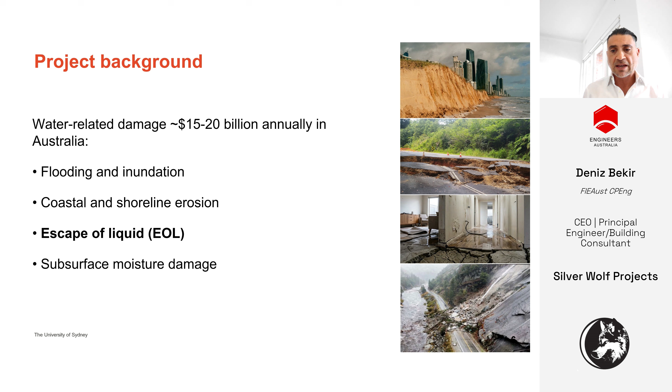And that could be consisting of flooding, inundation, coastal shoreline type erosion, escape of liquid, and that being escape from a fixed pipe or an open pipe such as a water pipe, a flexi pipe, stormwater pipe, sewer, and subsurface moisture damage. So within the insurance industry, there's different perils, but the escape of liquid and flood damage is one of the major losses that we in Australia face.

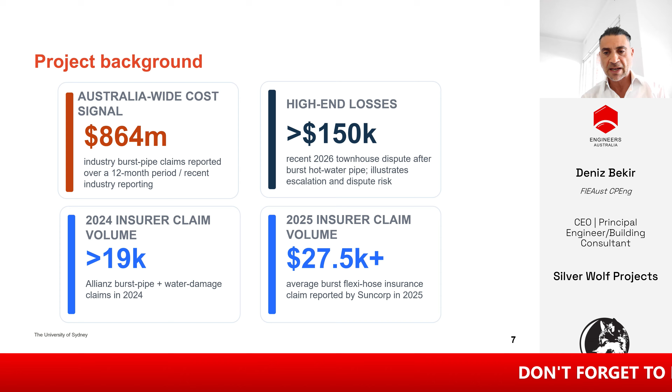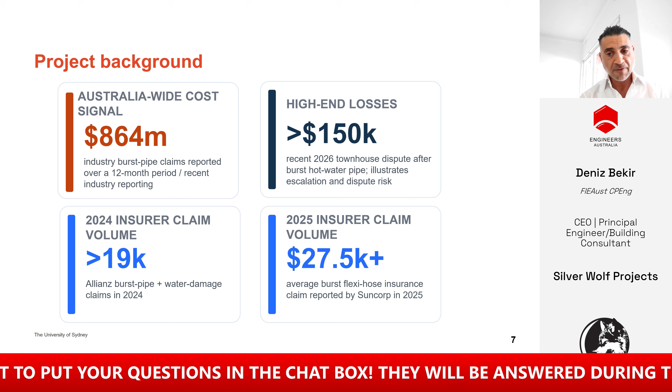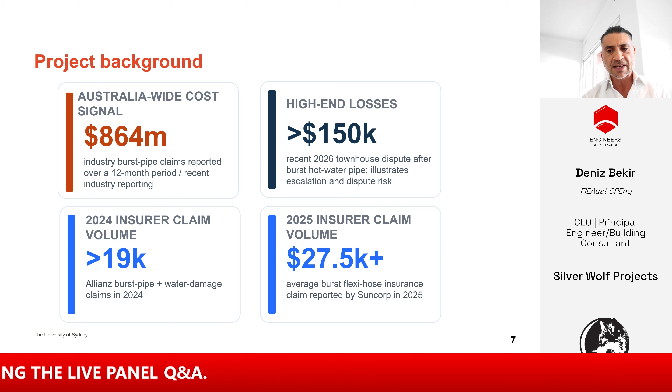And in saying that, the assessment process is very important, because in some cases, when it's not clear if resultant damage - that's damage that has resulted from that claimed escape of liquid or flood - has caused damage to that building, that is where dispute and issues arise. So this study is being put together in order to mitigate that, to give clarity and transparency relating to engineering assessment, as well as the building works for all stakeholders within the insurance process.

So why do we need this study and the development of this guide? And why is it time to take out the guesswork out of flood and escape of liquid damage assessment and reporting? It's an interesting question, because at present, the way engineers and building consultants assess claims is through general observation and other forms of documentation. At this present moment, there is no scientific grounds for understanding what the resultant damage would be or has occurred from an escape of liquid or flood.

And as the answer says, it would benefit all stakeholders. So this particular study doesn't just side with one - the insurer or the insured. It ascertains a fair and reasonable outcome for all parties. Because what this does, without putting a pun, is draw a line in the sand and say what damage could or could not have resulted following an escape of liquid.

So the reasons for this: it brings science and engineering into the realms of engineering assessment of escape of liquid claims or building movement claims, giving proximate cause rather than just an opinion or an assumed arrangement. This study will produce a zone of influence, and that zone of influence will bring an area of damage that would have resulted from an event, and it will reduce costs in the sense of wasted, lost, or incorrect type assessments or building work.

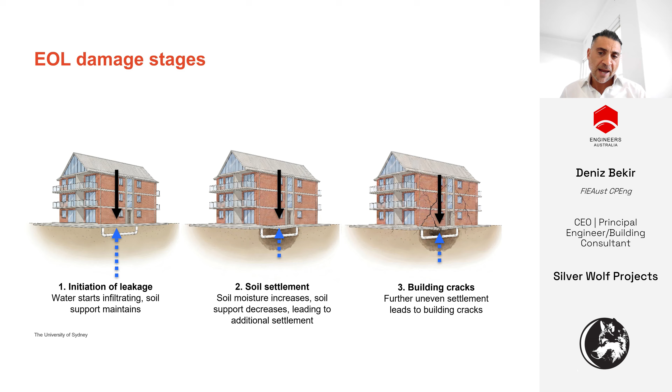It's very common in an insurance claim to have a leaking pipe or an escape of liquid from a bathroom waterproofing membrane, or an overflow or a broken flexi hose in a kitchen, that would inundate an area, go into the subfloor or subterranean area, cause saturation over some period of time, and then a claim for resultant building movement or cracking or damage would be lodged.

And as engineers and building consultants, independent professionals engaged by the insurers to provide that advice on causation, at this present moment we would take this approach, which unfortunately is not empirical in the sense it's firmed up with science, but more based on reference.

So let's have a look at this so you can get a feeling of what we're discussing and what we're intending to do with the study, to formulate a better method to finalise a conclusion on resultant damage. So an example would be a very simple one - we'd have a single-storey dwelling, brick veneer, metal roof.

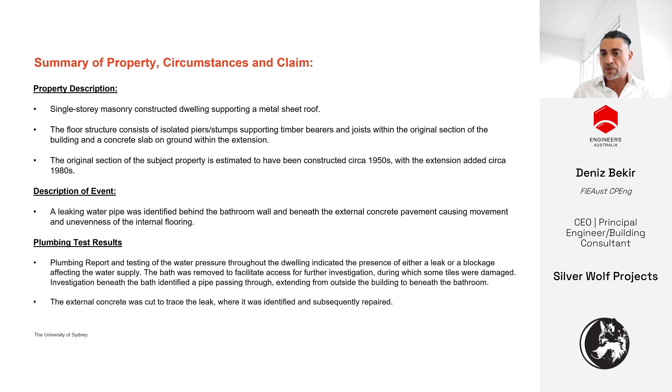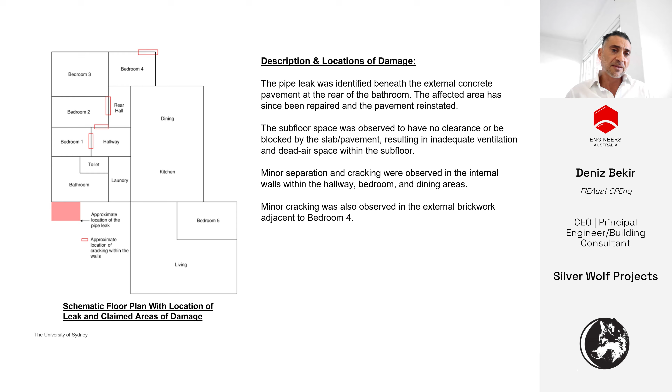So in essence, we've got a floor plan here where you've got an approximate location of where the leak was, which is outside of the bathroom. And then we have areas of claimed damage relating to bedrooms 1, 2, and 4, identified by those red squares.

And then sort of consistent damage that's been claimed as a result of building movement. So this would be within the area of the posts and piers, so differential movement would be consistent with the claim of reactivity from the ground.

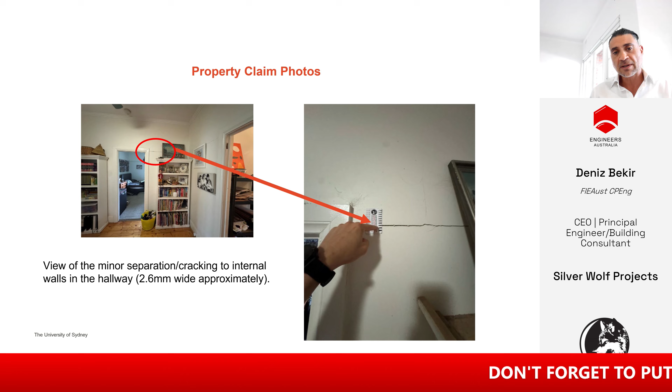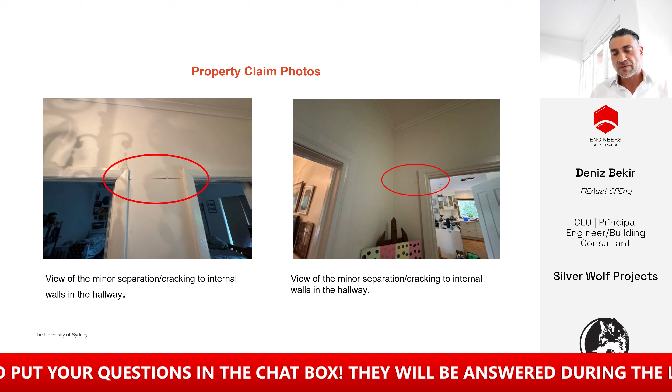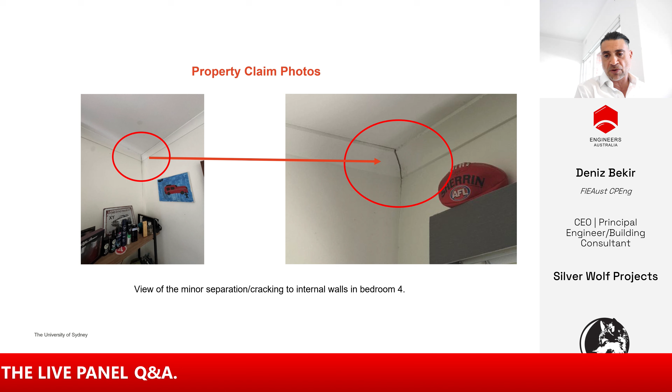And other types of cracking and movement within the plasterboard have again been claimed as a result of the escape of liquid and resulting building movement from ground reactivity due to the pipe leak. This would be a very common assessment for most engineers or building consultants looking at causation within the insurance industry or other building diagnostic professionals relating to claimed ground movement, in this case from reactivity.

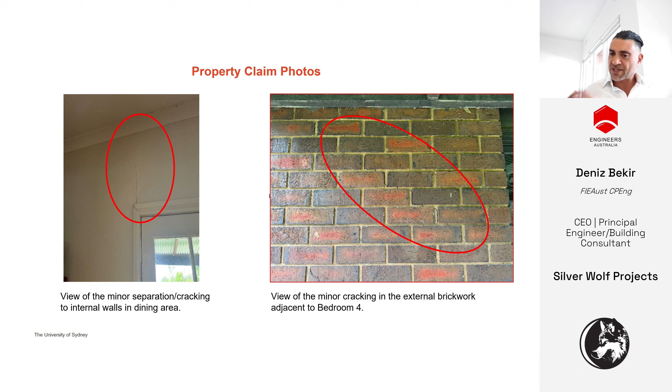At this moment, we would generally use standardized methods of adopting diagnostics. That would be, in essence, looking at the building code, the Australian Standard 2870, and the CSIRO publication on foundation maintenance and footing performance.

At this stage, most engineers and building consultants would look at that, identify the ground conditions, look at the type of damage, and make an opinion on the basis of their experience relative to the length of crack, size of crack, maybe the freshness of it, the thickness, and the geometry of how it has cracked, to assess whether that was as a result of any ground movement. The problem with this is that it's all based on visual evidence.

It's all based on assumption and correlates with the expert's or engineer's or building consultant's experience. It doesn't have any scientific basis in the sense of categorically nailing down that this was a clear result from the leaking pipe. Yes, it could be building movement as a result of ground movement, or it could also be building movement due to articulation or poor workmanship.

So we start to remove ourselves on a balance of probabilities on what the causation would be, but again, we're not identifying exactly that it's a result from science or geotechnical study that this was due to ground movement from a leaking pipe.

Other methods, obviously, is the use of the plumbing test to identify whether there was a leaking pipe, which is standard - we actually have to identify whether there was or wasn't. But this again doesn't determine whether the resultant claimed damage is a result of that leaking pipe.

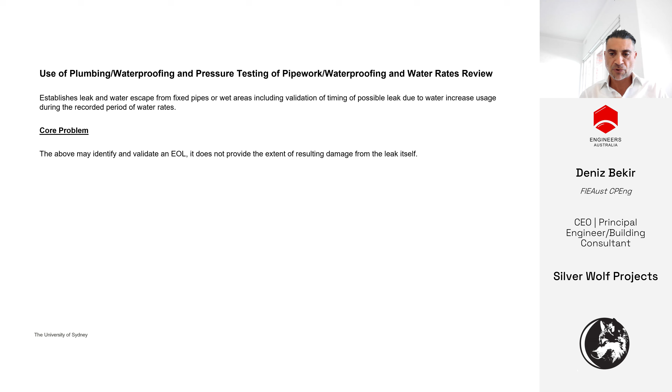One of the big tools in diagnostics, particularly with building and earth moving and ground movement, introduced specifically within the insurance industry, is floor level surveys. Floor level surveys are a method of measuring the floor level over the entire floor plate to establish whether there's any movement, the geometry, and any distortion.

The issue with that is that it's relative to the time that you take the measurements. It doesn't have a datum of what was previously there, nor what was there afterwards - it's set at the time taken. So it's not really a clear method of diagnosing whether the damage had occurred. It just shows you a real-time snapshot of what the floor geometry is.

So what's missing is a datum point - the datum point of what was previously there, or in this case, a zone of influence to establish, well, if the leaking pipe occurred in the bathroom and we established through this guide or through the science of ground movement, through time and reactivity of soil, that if a pipe leaked for 7 days and the ground was highly reactive, then subsequent to that permeability and reactivity, an expected zone of influence from the bathroom would be 3 meters.

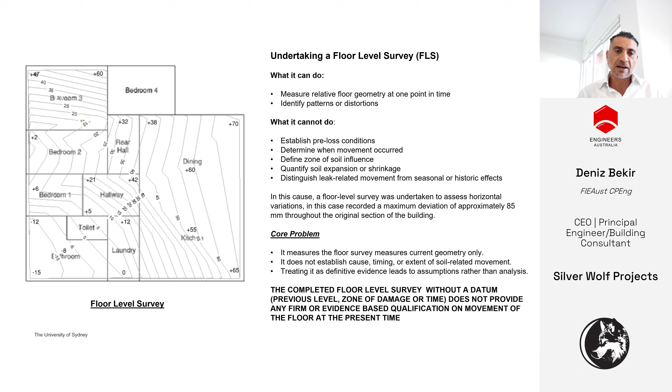So if we were to establish that, then we could have a datum, because you would do the measurements within the 3 meter radius and outside of the 3 meter radius, and then you'd establish if there was a point of difference in height, then there's differential movement, therefore it was a result. So it gives you another piece of substantiated evidence that can enable you to determine whether this movement, as claimed, was a result of the leaking pipe.

So in conclusion, we would generally identify that damage may have resulted from soil reactivity, building movement, thermal expansion, contraction, poor workmanship, and defect. But in saying that, we haven't got, at this moment, a categoric method of determining a correlation between damage, leaking pipe, and building movement. In establishing this guide, that is our aim and objective, because at this moment we don't really have a validity in the sense of another form of approach or evidence that engineers can use to correlate their visual inspection.

But by creating the guide, with a zone of influence around a point of damage, this can be a line in the sand where differential geometry can be used to prove whether or not it was part of that leaking pipe, as well as the methodology of how that would have occurred if it didn't correlate with the study itself. So it's very important that this piece of information gets produced, because it strengthens argument, approval, or rebuttal on a leaking pipe claim for both the insured and the insurer.

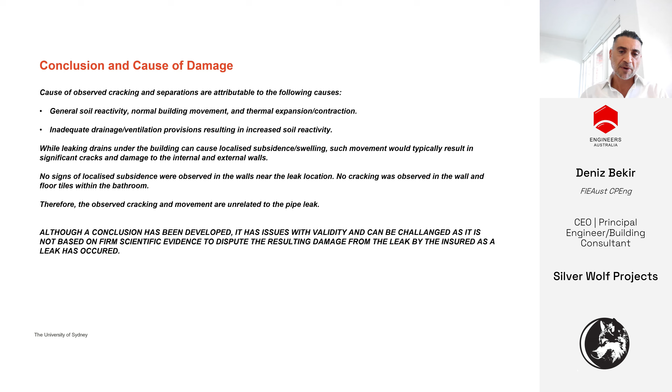In saying that, a lot of disputes occur as a result of this. The Australian Financial Complaints Authority, AFCA, is within the Insurance Code of Practice the point of arbitration where external dispute resolution within insurance claims is met between the insured and insurer, and they produce the final ruling on that, subsequent to advising and reviewing the advice.

In the approach to the proximate cause publication in April 2022, they put forward the factors they would require in order to make their determinations. This would add more credence and value by providing more evidence as to what they would determine as resultant damage or proximate cause, rather than just an opinion and visual assessment. So this is an assisting piece of information that enables better claims outcomes, clearer resolution, and transparency with the insurance process and claims handling methodologies.

So what we're trying to do here, in essence, is that at the moment we've got one equation and two unknowns. What we're intending to do is bring it to one equation with one unknown. So at the moment we've got an escape of liquid, but we don't know the duration, or we can't establish the duration. We know the soil response, but we don't know the extent of damage.

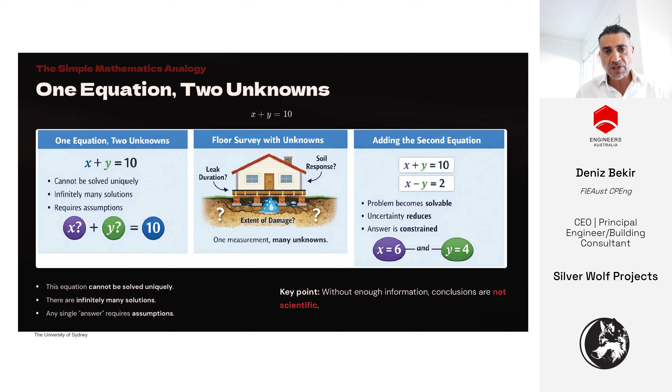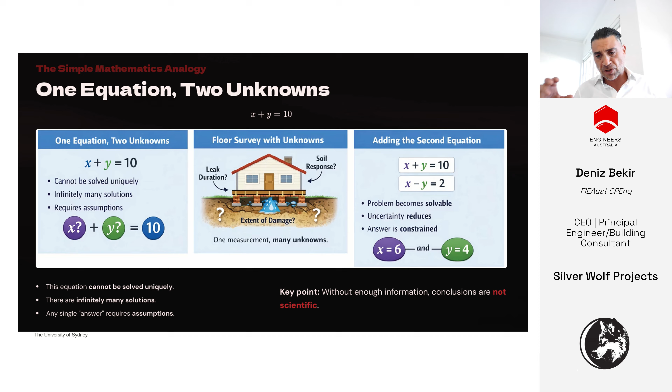So what we can do with that equation is, if we know what the soil is, and if we know what the leak is, then through this guide we can work out an extent, and that will give us a formulated response to resultant damage. This creates an ability for an engineer or building consultant to finalize with more clarity what resultant damage would be, rather than just speculative assumptions on the damage methodology, geometry, or visual assessment.

So it becomes a bit of a mathematical equation, and this mathematical equation works with other tools such as floor level survey. So if we've got an established zone of influence, we can use the floor level survey to determine whether differential movement between the zone and outside the zone has occurred. That creates an equation, or another form of evidence, to suggest or indicate, on the balance of probabilities, that escape of liquid has caused damage. So that is very important as well.

So what we're doing is bringing in the science and the engineering, removing the assumptions, to bring a solvable property equation with respect to saturated ground as a result of escape of liquid.

So the zone of influence then starts to determine the unknown. It creates the variable that we can use to determine whether damage specifically from an escape of liquid point, at a period of time, relative to a type of ground, how much would that have radiated and where would that have propagated as a direct result of the escape of liquid.

So this starts to become clearer on the resultant damage, which is where, as insurance, building, and engineering consultants, we've been asked to provide that causation report so the insurers can make their determination as to whether it was a result of the claimed event.

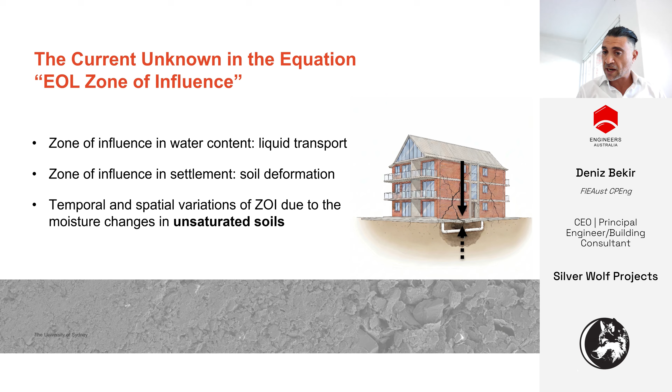So what we're trying to do here, leading up to Professor Gan and his presentation with the methodologies of how he's going to create this guide with his team, the Geotechnical Department of Sydney University, is that the aim of this study and the guide for industry is to move from opinion-based assessment to research-based assessment. The objectives of the guide and the zone of influence is that we're moving away from just assessing damage from visual inspection and diagnostics of building movement and claims of damage, now to more science and geotechnical based assessment relative to the time of leak, the extent of leak, the reactivity of the soil, and the radial movement that would be propagated subject to the study and the science and engineering behind it.

So I now am very proud to establish the understanding, the objectives of this study, which AiBEC has been involved in with the University of Sydney and Engineers Australia, and I'm pleased to now present Associate Professor Gan for him to advise on exactly the science and the engineering behind the study and what it's going to take to bring this to fruition.

I'd now like to welcome our second speaker, Associate Professor Gan, Acting Head of School of Civil Engineering at the University of Sydney. Associate Professor Gan holds a PhD from Karlsruhe Institute of Technology, Germany, and is a Fellow of Engineers Australia. His research expertise spans geomechanics, granular materials, and fluid transport in porous media, making him a leading authority on complex soil-water interactions. His work consistently blends fundamental engineering science with practical industry applications to solve complex infrastructure challenges. He is currently collaborating with Silver Wolf projects at AiBEC to develop formalised, empirically rooted approaches towards reliably assessing building movement and property damage caused by floods and escaping liquids.

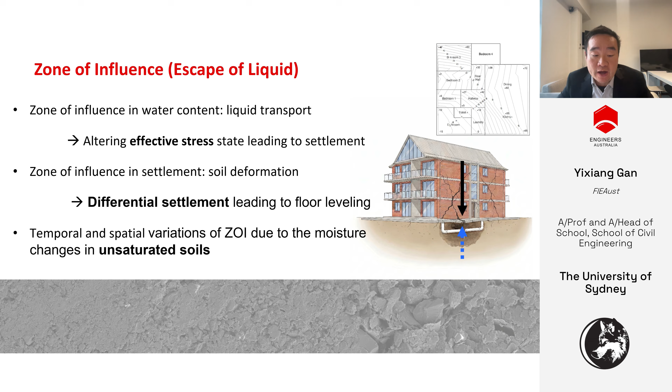Our topsoil layer, where this liquid leakage will have influence, is typically in an unsaturated situation, where the soil is basically having partially water, partially air in its void space. Now, if we look at a pile of dry sand, and try to drop it from above, we can form basically a typical stable structure of dry sand, which we call the angle of repose. So for our geotechnical engineering, this is the basic idea of how the soil's strength will look.

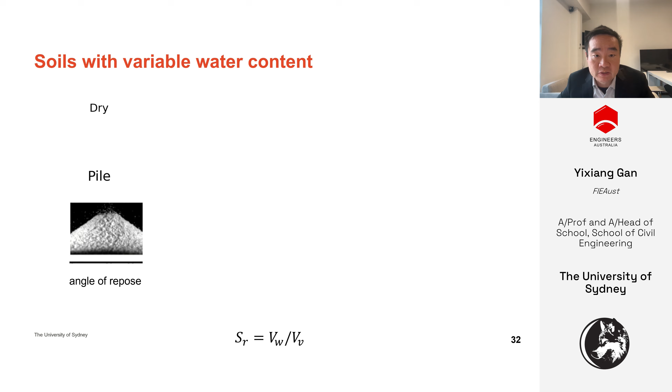For this type of sand, when we start adding a little bit of water, not too much, or keep adding water up to a certain point, we form eventually all these very interesting structures, including, at a certain range of water content, forming a tower of sand. Basically, the sand can support itself with the presence of a combination of air and water in its space.

Now, if you keep adding water and oversaturate that water tower in the middle, until the point where the sand goes to the fully saturated state, which is submerged in water - the pile on the rightmost of the screen is similar to the complete dry sand pile on the left-hand side.

This example, even though it's purely about sand, is meant to show how the variation of water content eventually affects the strength of the sand pile in forming this structure. We can characterize this using one simple variable called degree of saturation.

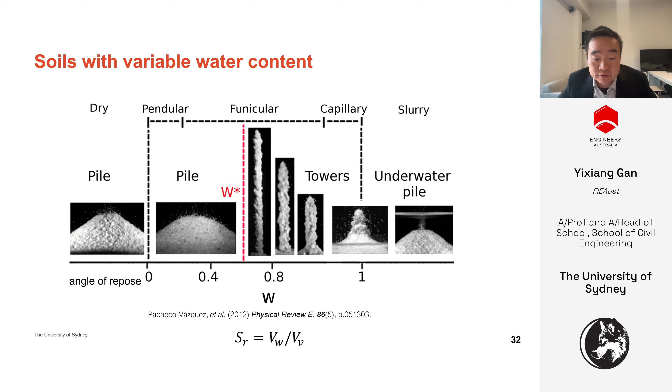Degree of saturation is the ratio of the volume of water to the volume of the void. In soil mechanics, when looking at unsaturated soil levels, we're basically characterizing three volumes: the solid, and the void, which combines the volume of water and air in the void space.

In the leftmost figure, we can define void ratio and degree of saturation at different states. However, in a more realistic scenario in the middle, if we look underneath a footing, we find an area where the soil is fully saturated.

We can define this as a water table, below which all the soil will be fully saturated, and above which we have a zone where air and water coexist in the void space, forming an unsaturated zone. These zones are eventually influenced by evaporation events.

The rightmost case shows a study looking in detail at how water is distributed in the void space, using a much simpler example than sand: the glass beads system. You can see the water forming in different geometries, and these interfaces between air and water provide additional strength to the soil samples.

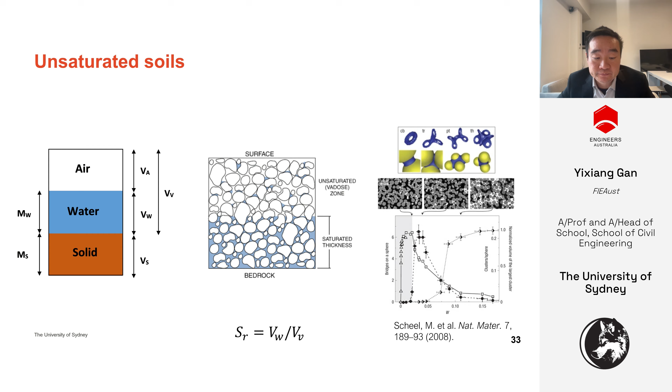Starting from the simple example of sand, in evaporation cases we typically look at foundation soil types such as silty clay or clay.

This leads us to looking at how soil type eventually impacts evaporation as a key input parameter here.

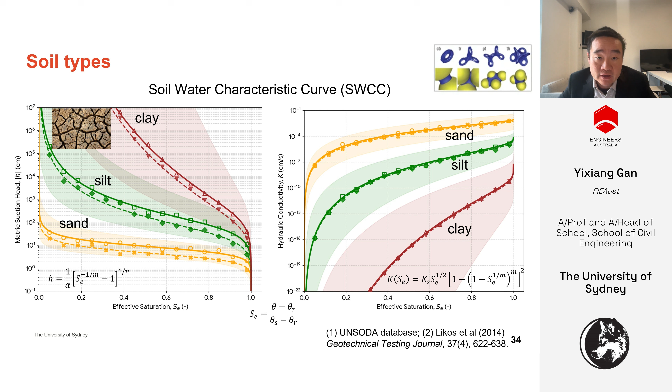If you look at this graph, we can also see a dotted line and a solid line, showing the range of drying/drainage and wetting pathways of these soils at different water content.

This leads to a study looking not only at evaporation, but also how, during the restoration or recovery stage, water will contribute quite differently in the pore space of the soil.

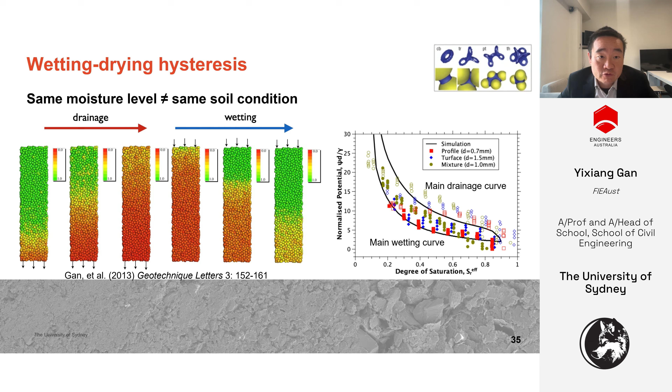We won't look in detail at the granular scale of how water distributes in the pore space, but rather we face the challenge that we can't easily model the interaction between soil and water in the pore space. What we adopt in this project initially is some kind of quantitative approach to describe the effective stress in unsaturated soils.

So here we use Bishop's equation, distinguishing total stress, effective stress, and pore water pressure. These pore water pressure and hydraulic conductivity values can be described by the soil water characteristic curve we showed two slides before.

Then the elastoplasticity of the soil under deformation at different water saturation can be described using the effective stress, via the modified Cam Clay model, describing the yielding, hardening, and plastic flow rules of this model.

Finally, the moisture transfer can be captured by the Richards equation, using the relative hydraulic conductivity described as a function of the degree of saturation.

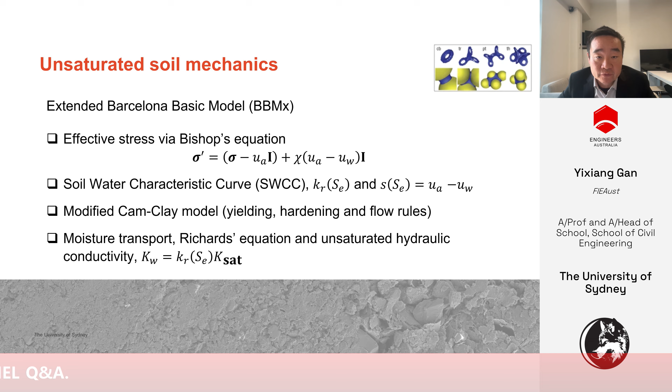Eventually, when saturation reaches 1, meaning water fully occupies the pore space, the hydraulic conductivity returns to the permeability at the fully saturated state, K-sat, as indicated in the last paragraph, using the constitutive law model we just discussed.

In our project, what we're aiming to do is develop a physics-based numerical model implemented in a finite element solver. We do have multiple finite element solvers available.

In this project, we are starting with a MATLAB interface with a COMSOL finite element package to study building-scale problems.

Then we study and generate the same building scale models in different parameter spaces. We'll discuss later this parameter space of soil loading and water leakage conditions, and generate a large data set used for training a validated surrogate model, which in the beginning we validated against our finite element analysis results versus available long-term field data. Using that large data set, varying different parameters and considering uncertainty and probability of these parameters, we eventually develop a data model to be used later in the field.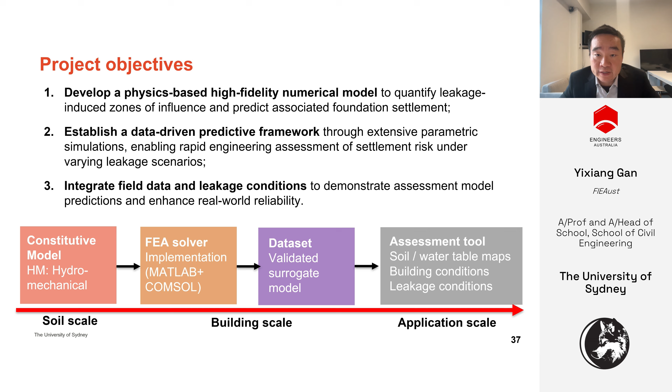Now, to be more specific, in this project we will have 3 phases. The first phase is using the implemented numerical model at the building scale, shown on the left of the slides. Then we're using a different range of input parameters, which contains soil property, water tables, site conditions, and escape liquid conditions, including how much water in terms of volume, but also the duration of the leakage events.

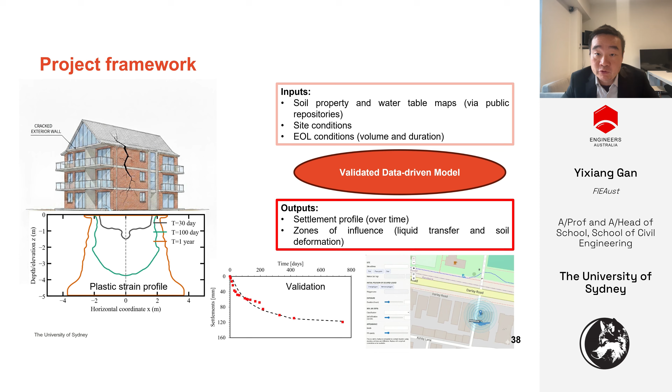By varying all these variables and putting them into our model, we generate a large data set, then use a data-driven model to eventually replace the finite element method, taking the inputs and giving you the outputs of concern, illustrated by 2 zones of influence. First, the liquid transfer, how far the liquid goes; and second, the soil deformation, how far the settlement influence goes. Now, to give you an example, we're starting with a building scale model, which could be specific.

For this process, we're looking at a specific condition, showing a finite element model on the right. We're using an axis symmetric case, and in the center we have a loading zone, in this case with a radius of 2 meters. Underneath the footing, we have the escape of liquid site, with a liquid inlet of 1 meter, as an example.

In this specific case, we add the water table below 5 meters and look at this model using a given set of soil properties, site conditions, and escape liquid loading, listed as input parameters. Here we show 4 parameters as an example for the soil model, and 4 parameters for the site conditions, including the pre-consolidation pressure, water table depth, loading of the foundation, and the size of the foundation loading.

For the escape liquid loading, we have 3 parameters: the water flux phi going through the leakage site, how big the leakage site is (r), and the duration of the leakage event (T). Eventually, the finite element model in this specific case gives us a zone of influence and a settlement profile over time.

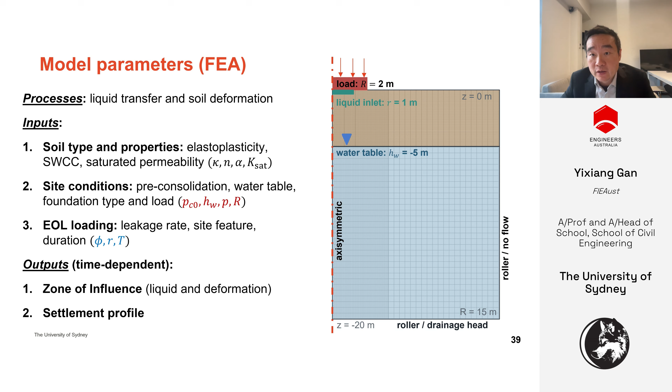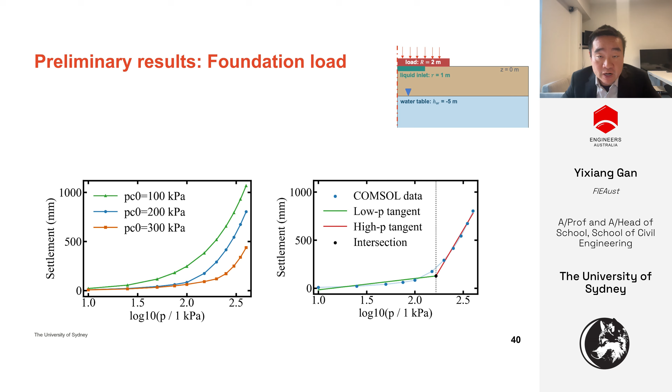Before we do the hydraulic test, we do a preliminary loading on the foundation on the soil body, with the water table set at the depth mentioned before. Then we can see the settlement changing over the loading applied for different pre-consolidation pressures. What we're trying to do here is find a pressure critical to the foundation, then apply that constant pressure. Then we start our hydraulic loading.

In this animation, we can see from the leakage site how the water transports from the top going down, reaching the water table over a long duration of time, with the profile still evolving over time. On the right, we show contours of the change in water content over time, at a month, a quarter, and a year in this case. All these are studies conducted in this finite element analysis.

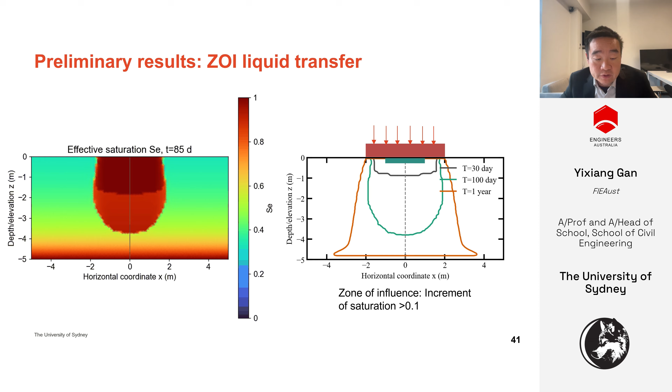Looking at the time evolution of the liquid, we show how far this liquid influence zone develops over time. With the water distribution, the water infiltrates into the unsaturated zone on top of the water table, changing the stress conditions while we maintain a constant loading on the top.

What happens is that adding water changes the suction state, and with the water, it reduces the soil's effective stress and reduces the strength. We track the volumetric strain evolution over time underneath the footing. On the right, we plot again a month, a quarter, and a year, showing how much this additional settlement influence zone evolves over time.

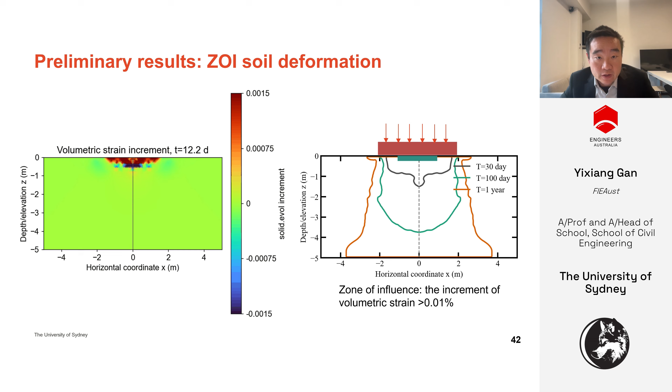But we can also track the settlement profile during the escape of liquid events, looking at a given position over the duration of time, or the total profile of the surface over time on the right-hand side.

Now, all this study at the moment, we're putting a different saturated hydraulic conductivity in a range just to see what's the influence of this input parameter on changing the settlement over time. This is one example, very case specific.

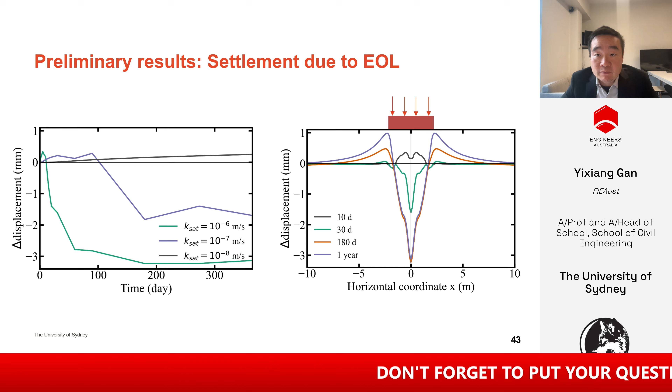What eventually we want to do is formulate this as a key part of our project roadmap for the months to come. What we have done here is look at a setup of how we transfer the inputs into a hydromechanical model, and provide the outputs in terms of settlement profile and zones of influence.

Eventually, what we're trying to do is vary our input parameters, going through a wide range of soil properties, site conditions, and escape of liquid loadings, as shown in the parameters in the bracket just below the box.

As we know in our standard, there is multiple categories of soils. So the study will be using a lot of soil properties, putting them into a model to generate the perceived or predicted settlement profile.

With this information, what we're trying to do as a next step is use that data set to develop a data-driven or surrogate model, replacing the calculation for case-specific or soil type-specific cases, to have a very rapid data integration assessment tool.

A typical example is shown on the bottom right. If we have a map and some kind of soil characterization information, along with building conditions to fill the parameter space, then if an escape of liquid event happens with a given volume and duration, we can predict over time what the influencing zone is in terms of water content change and additional settlement.

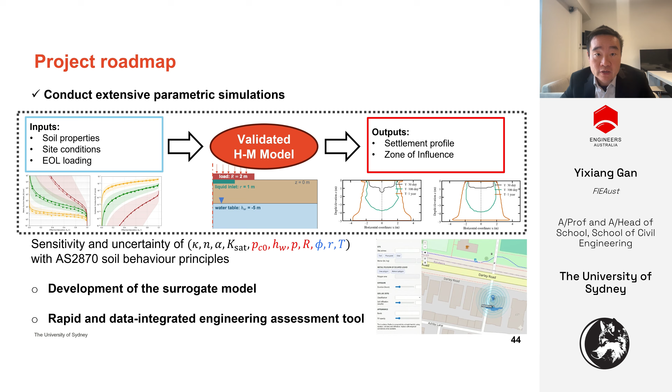So that's basically the total plan we were having. Up to now, since we only have 4 months completed for this project, what we've achieved so far is identifying the key influencing factors of the escape of liquid event related to the assessment.

Then we also discussed the roadmap for how we can achieve a rapid engineering assessment tool. We just need to go through a validation stage, and a data training stage in the next phase of our project. Of course, there are a few open questions.

We've found a few validated long-term site monitoring datasets, but the more data, the better for the prediction. This is also open to the community - if anyone has long-term monitoring data in terms of moisture change or settlement during escape of liquid events, that would be much welcomed for additional validations.

We also know that the range of model parameters or conditions is quite large, so we need to consider a probabilistic analysis to account for uncertainty coming from soil type and site conditions, and provide guidelines showing the upper bound and lower bound of settlement or liquid transfer in terms of zones of influence.